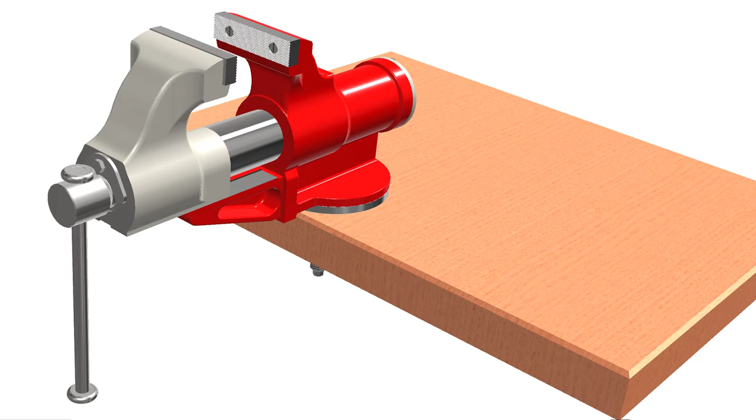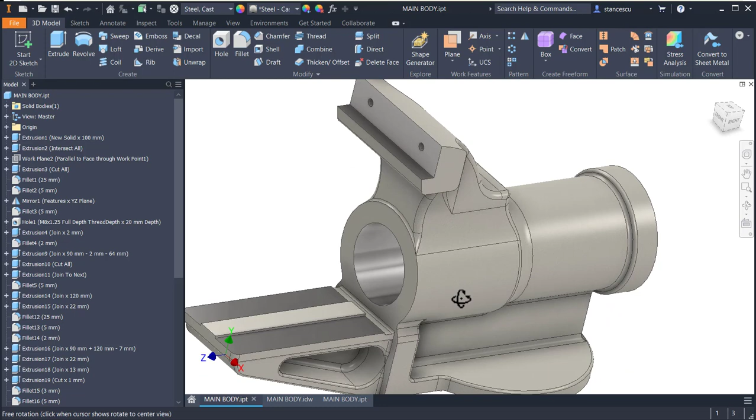Hi my friends, today we continue to construct this VISE by modeling the main body, the red one, which has this section, and this is what we want to create now. I modeled this already. I made also the drawing, to have all the data for our model.

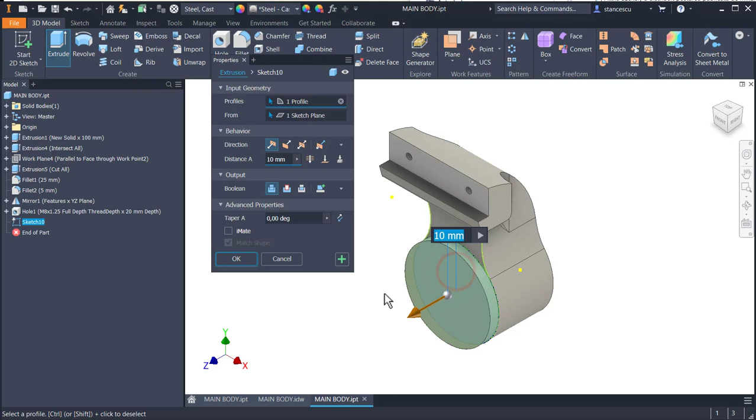So let's start. We open the body created in the previous tutorial and we add features. The first one is a circle. Over this sketch we place a circle, finish sketch, extrude this 2 millimeters. Okay, this is here, you see this 2 millimeters with the same diameter like the cylindrical body.

Now I'll add a fillet with a radius 2 millimeters, like this. Good. Now we go here to the back.

In order to create this extrusion, by respecting this dimension, which is of course also in the original drawing, you see 70 here for this edge. Yes, we try to respect the original drawing, of course.

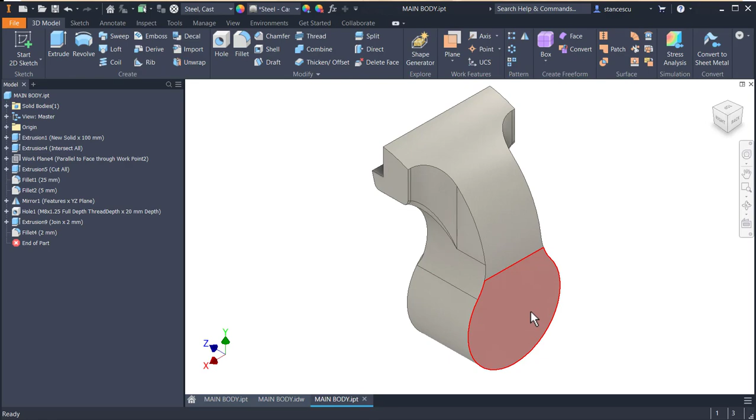Sketch, 70, horizontal line, dimension of 70, and we project geometry. No, this is not good. Geometry of edges, trim,

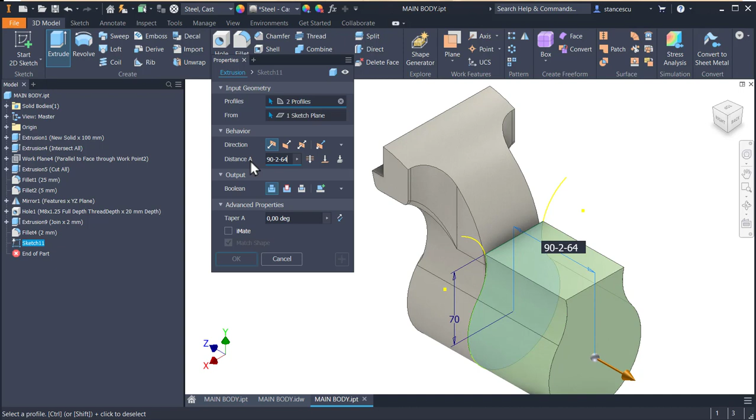and now we create the extrusion, which has dimensions 90 minus 2 and minus 64, which is the end of this, from the previous modeling of the small body. Extrude these two profiles. The distance is 90 minus 2 minus 64. Okay.

Now we have here a gap. You see, we need to cover, to fulfill that gap. But first, let's eliminate this pseudo triangle, by F5 to see back here, by projecting this face, and we obtain a line here, and we rotate on the other side to project also this line, which projects as a vertical line.

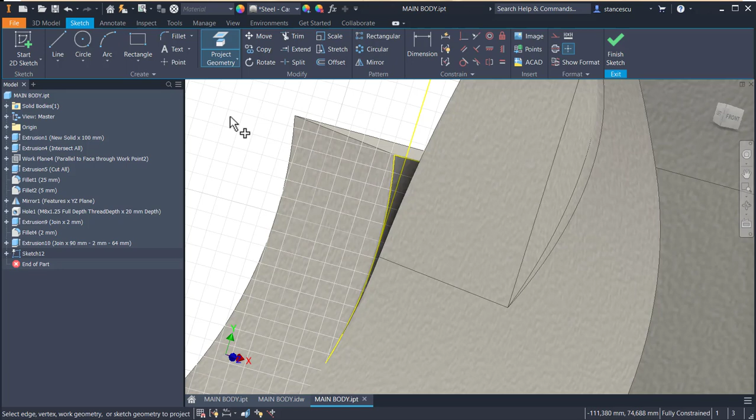Why? To apply extrude on this small triangle together with this other small triangle in the other direction, which is a cut, yes, all the way and that direction, yes.

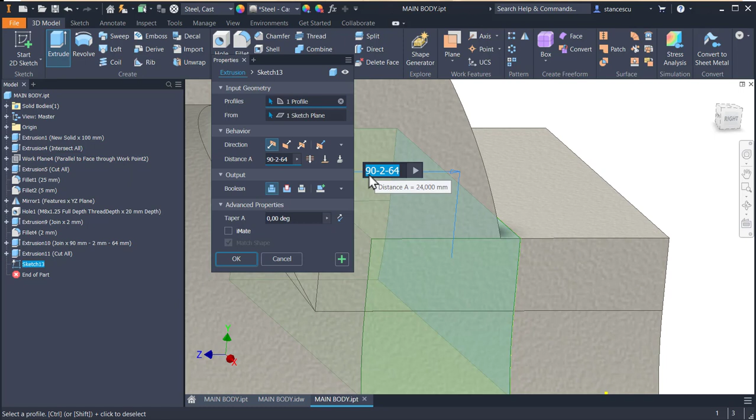Okay, now we have a new sketch here to be extruded to the face. Extrude, not 90 minus 2 minus, but to the part, to next. Yes, you see, we fulfill that gap.

Okay, good. Now if you take a look here, radius 25, radius 25, radius 2. And there are other radiuses on the other direction. Yes, for instance, 5 millimeters here, 5 here, and also this and this.

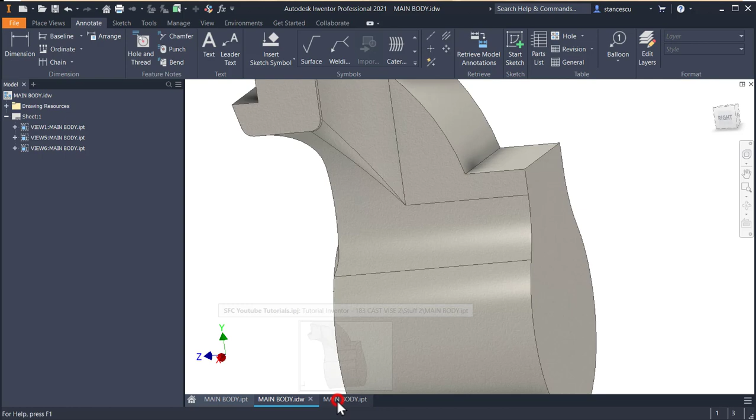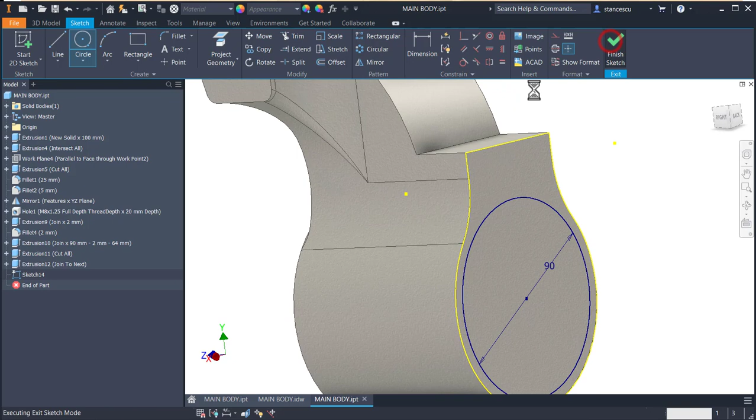But first let's create this cylinder, which is from the 90, 120 with a diameter of 90. Let's create main features and then fillets and so on. 90, diameter, finish sketch, extrude the circle on 120, a dimension in the drawing, also in the original drawing, you see, 120, this is.

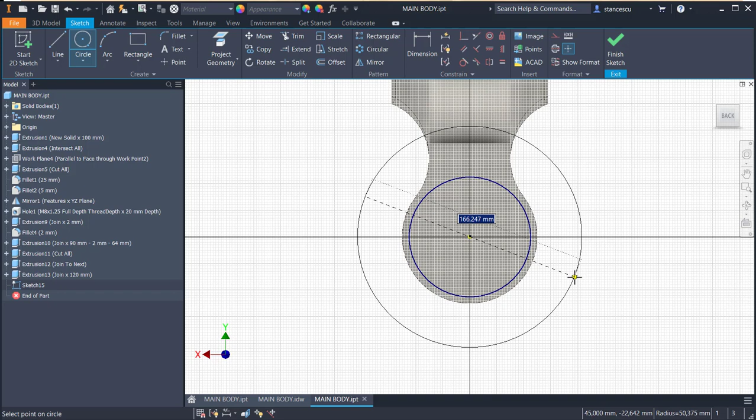Good. The other extrusion is this one, 22 with a diameter of 100. Let's create it here. 100 is a dimension of the main cylinder, so we can use this, but let me place here 100 as you see. Finish sketch, extrude 22.

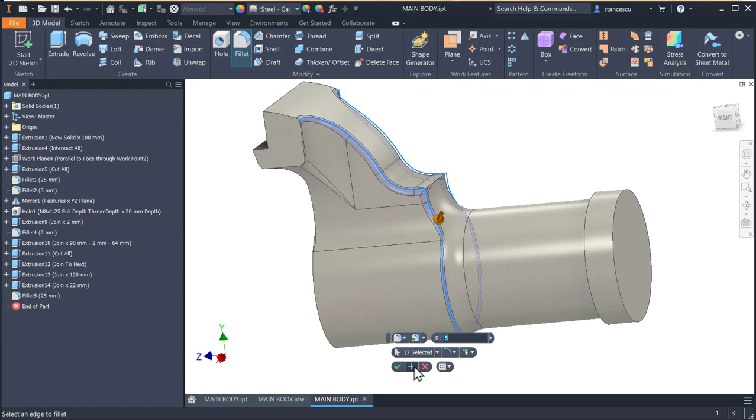Okay, we apply now that fillets 25, 25 here, plus 5 and 5 here, and around the object, plus 3 millimeters inside, 3, and 3 outside, and also 5 here, plus 5 millimeters and 5 here.

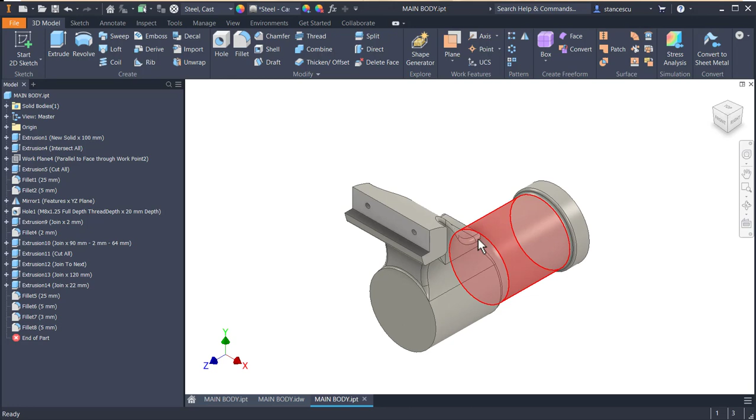Let me see if that's okay. Yes, of course, everything will be okay for this construction. However, I'll add another fillet of 2 millimeters here, 2, even if in the original drawing this is sharp, but I don't think that's good, so I placed also here radius 2 to have a smooth connection between these two faces. I think is better. Good.

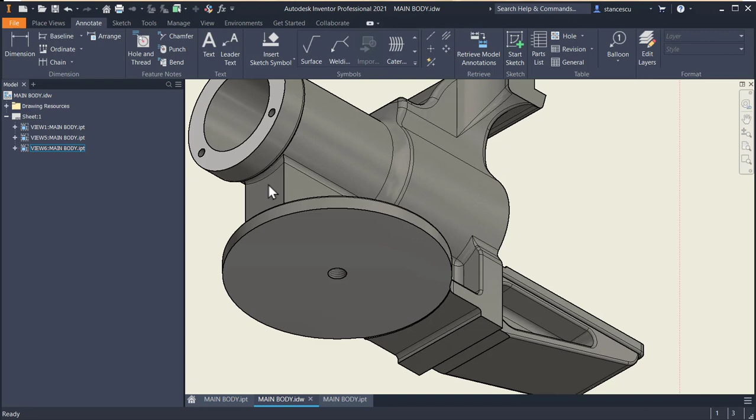Now we create another volume, which is this one. You see here, this or this one, with dimensions of 40, the thickness, and 97 minus 12 is this face, which is 85. So, and the length is 90 plus 120 minus 7, because we create it from here to here. We started on this face.

Let's start it. A rectangle of 40 tab, 85, not 85, 97 minus 12. Yes, we don't invent dimensions. We place this midpoint to the center point. Finish sketch, extrude

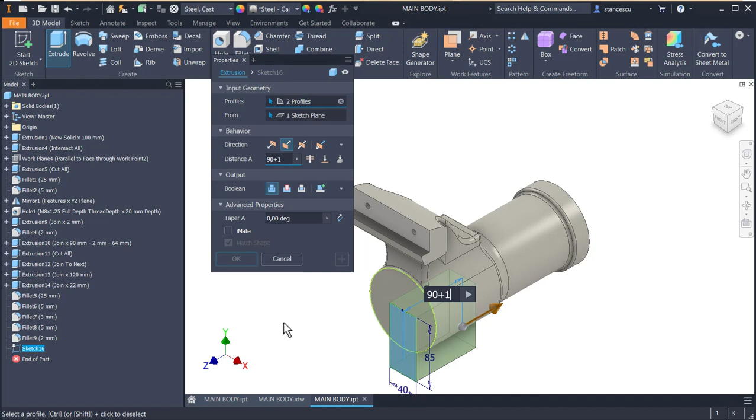this, the other direction, but not cut, join of 90 plus 120 minus 7. Okay, this is that volume.

Then there is another face here, this one, you see, which is this, which has dimensions. 60 degrees are these two lines, 86 the full width or length, and the dimension here is 104 from the center line, this face. Good. You will remember this, yes?

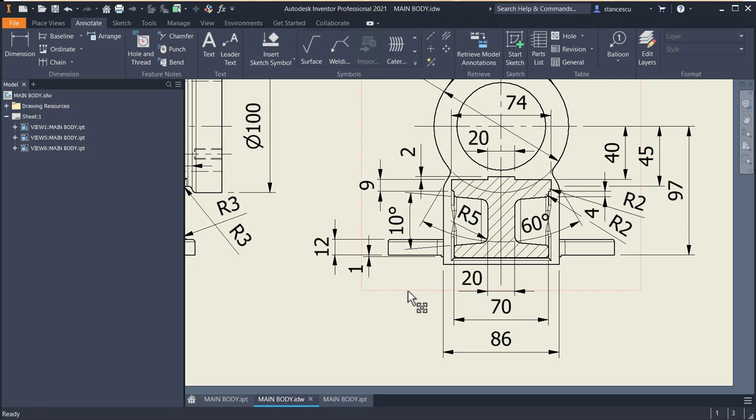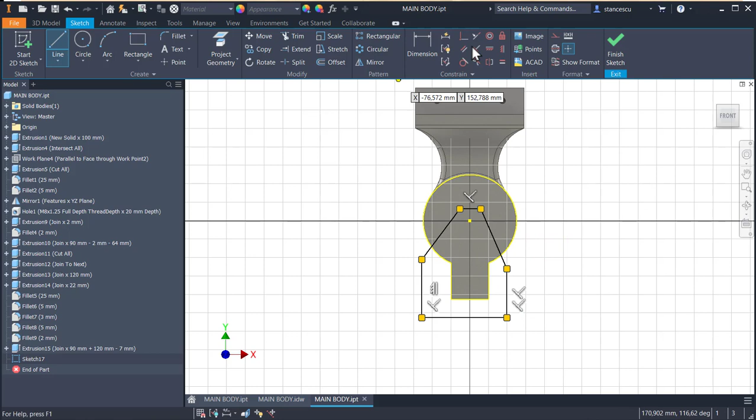104. Let's do it. The same face, line, line, another line. We go here and close. This midpoint over this, equal the two, and dimension of 60.

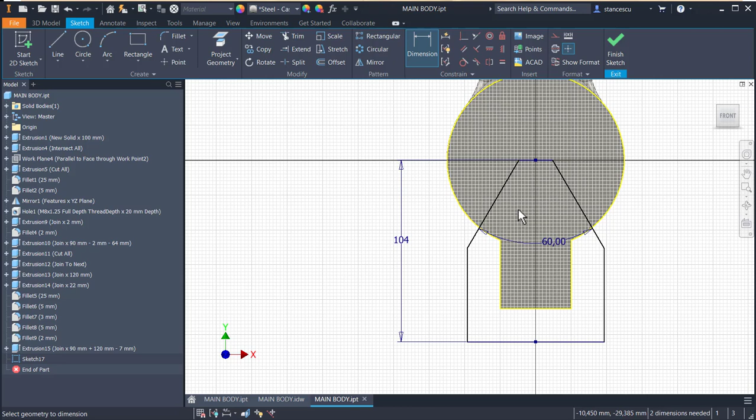Angle of 60. And if we place on the same vertical the midpoint with midpoint, we have a good, what is this is 104, yes, 104. But what is this? Let's see. This is 45. You see, this point is here, 45.

Okay, another dimension of 45. Finish sketch. The thickness is 22. You see here. Extrude this, the other direction, join 22. Okay, F6. Next is

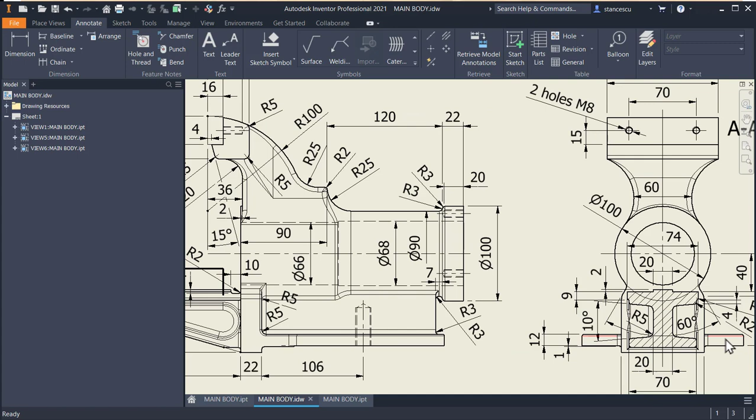this disc, yes, which is placed at 106 and has a diameter of 168, and the thickness is, be very careful, 12 plus 1, because there is a small gap here. Yes, and let's create, the diameter is 168.

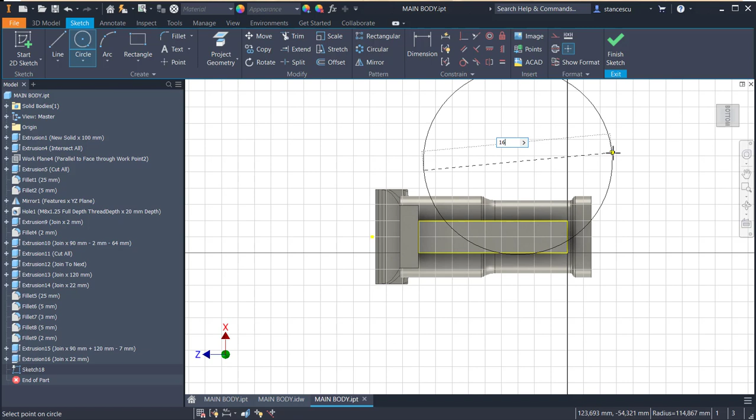Circle 168 placed on the same horizontal with this point. Horizontal is vertical here because Z is vertical, and 106 from here. Yes, you see, dimension 106.

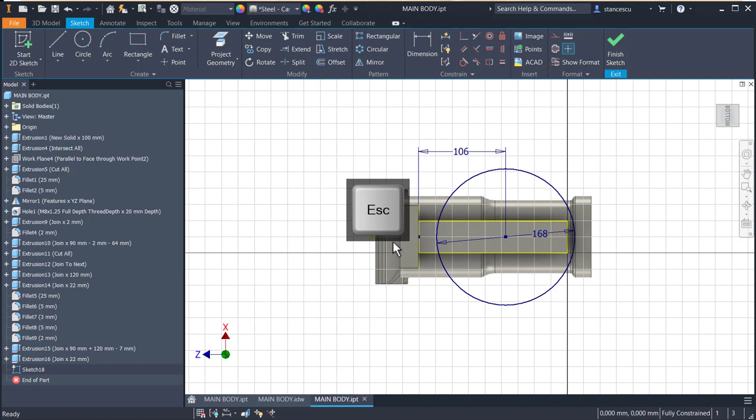Good. Now I make this construction because I have to draw 1, 2, oh, this is not horizontal, in fact vertical.

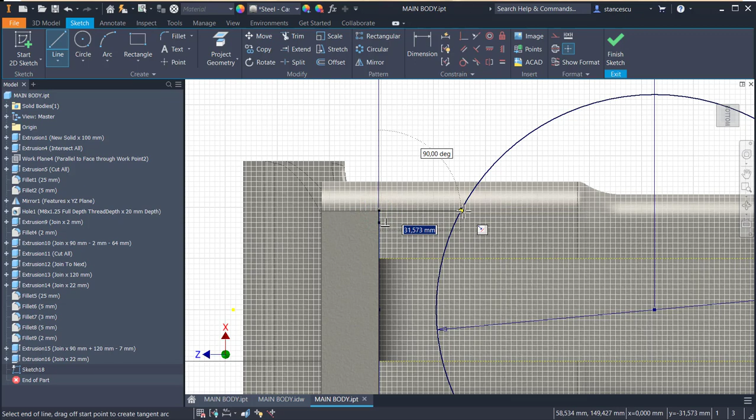Because another is this one. I correct this to be horizontal, which means vertical, but it connects two lines. This is the problem. It appeared this edge, so I have to cut, to delete this line, and to draw another one from the point to here,

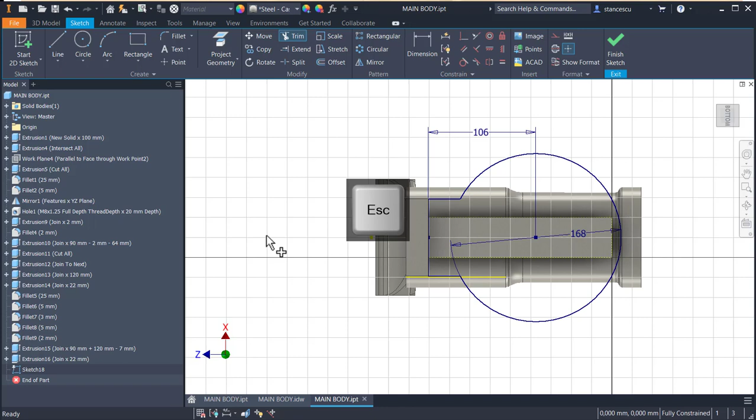trim this and also this. Yes, nothing is missing. Okay, finish sketch, extrude 13, as I said.

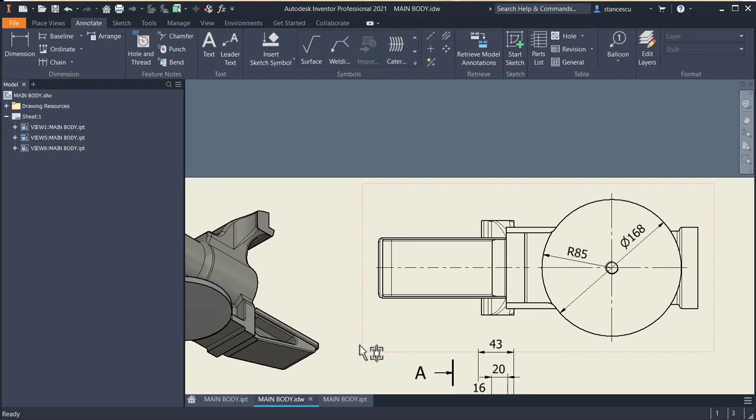Okay, and now that gap is because we want to apply a machined face. This face you see here, this is machined, polished, and there is 1 millimeter here. The diameter of that, the radius is 85. So we make this construction and we create a circle with the radius of 85.

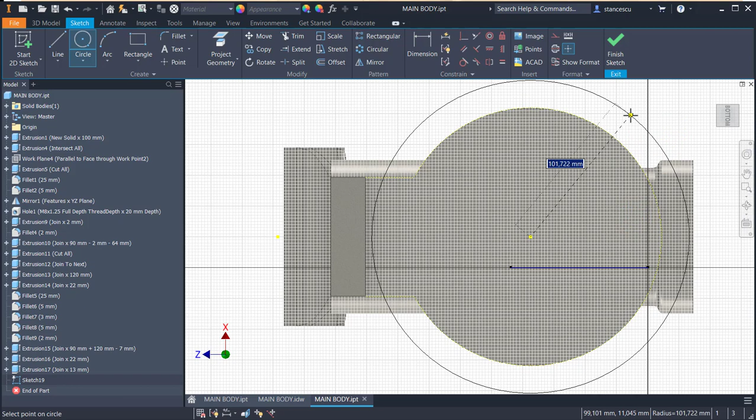Yes, there is a small distance here. Finish sketch, extrude, the other direction, cut indeed, but only 1 millimeter to be polished. Yes, now there is a small gap here.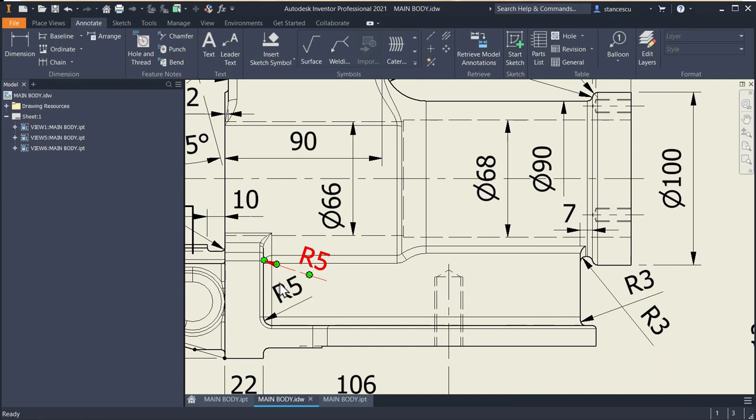Okay, it looks very nice, but let's see what about the fillets. Radius 5, radius 5, radius 3 here, and also some radiuses, 10 here and 5 here. 5, 5. Okay, let's apply these fillets.

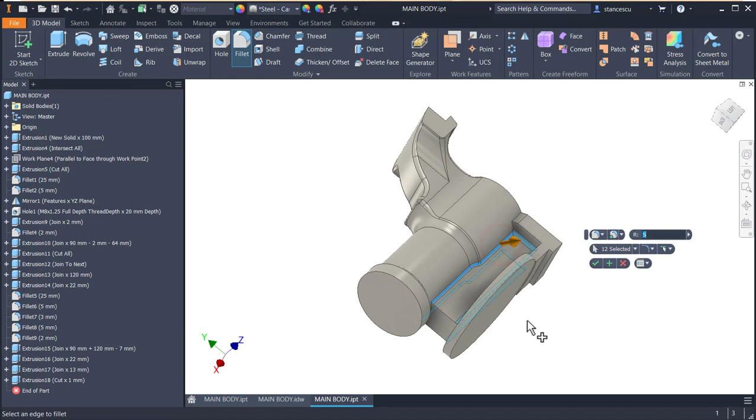So this is 5. Also 5, also 5. All this. Plus this one and this one. And plus this with 10. And on the other side also 10, plus here we have 3 up and down.

I think that's all. Yes, let me see once again. Yes, they are okay. Good.

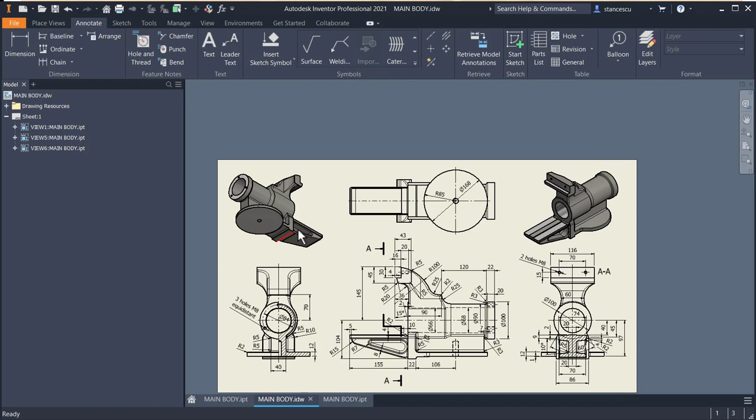Now we deal with this plate. There is a plate here, yes, which is this one, which is dimensioned here 9 millimeters thickness, starting from 40, and the width is 74. Yes, 40, 74, 9. And the length must be here 155. Okay,

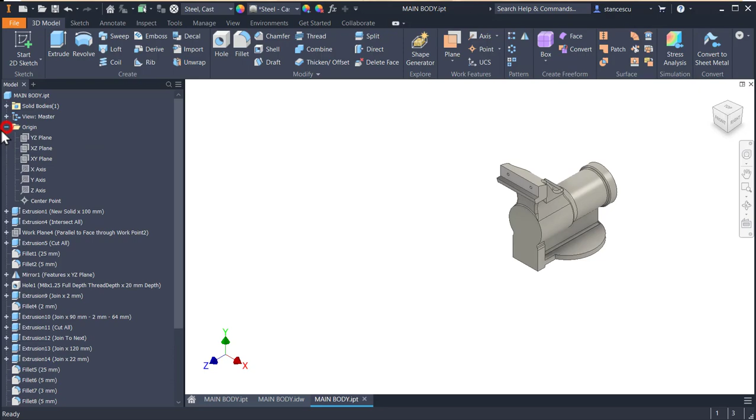we use a work plane, this one, origin plane, F7, rectangle 9, tab 155, alignment between this face or line and this line.

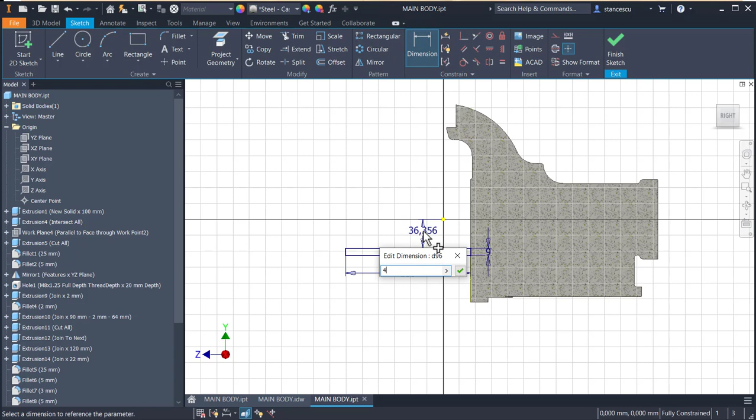We move the rectangle here to apply 40 millimeters from the center. Finish sketch. Extrude symmetrical on 74. Okay.

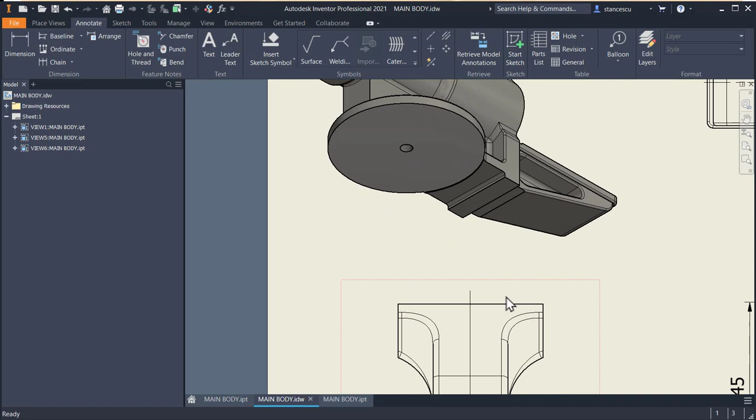Now we take a look to this volume, which is behind that plate. Yes, this. It has two hollows, two pockets on the sides, but we have dimensions. As you can see, this line starts from this point. Yes, but there is a dimension missing here.

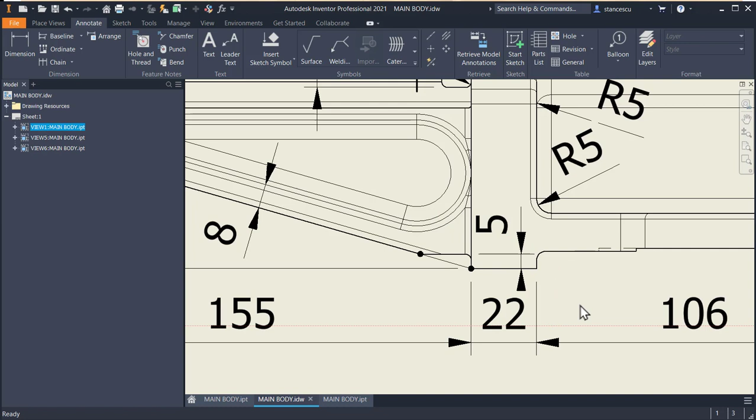You have to know that I add dimensions on my drawing when I see that they are missing, so you have to consider the last drawing as good. I'll show you at the end that drawing, not the first one, because there are some missing dimensions. Nobody is perfect, my friends. Nobody.

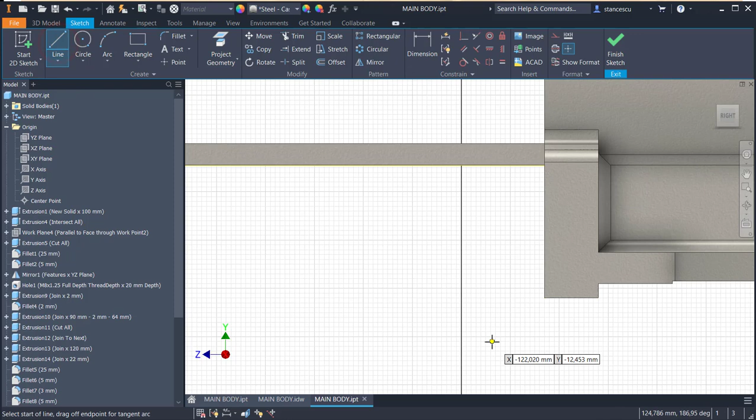Good. 5 for this line. 5 here and radius of 15 at the end. This is what we have to create. We use the same plane of symmetry. We project the two lines here and we draw lines. We start from this very point to here and an arc at the end.

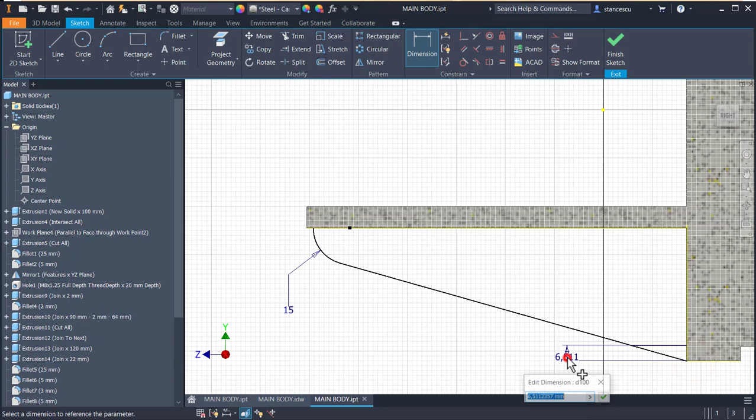Yes. Another line is here. We know dimensions. I want to be sure that this point is on this line, F7, coincident these two, radius 15, five and 5. Fully constrained. Now split this line and we make this construction line.

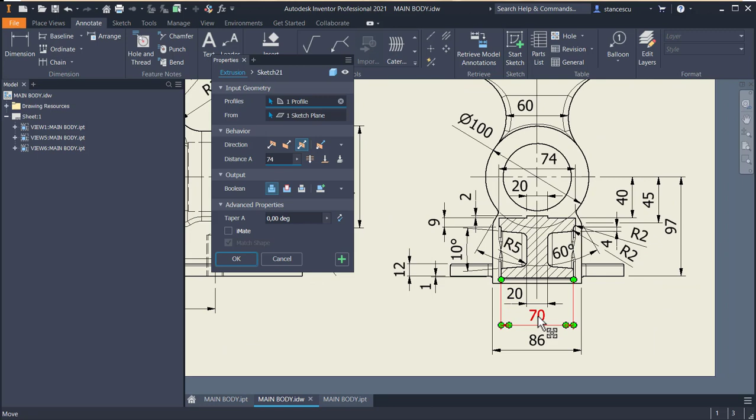Yes. I also draw here two lines. 1, 2. Now we have a closed contour, so we can finish the sketch. Extrude, symmetrical, on 70. Yes, this is not 74 but 70. Okay,

now the pockets. You see, not many dimensions are here. Radius 7, distance 8, and tangent here. Yes. And there is another dimension somewhere. Look, this one, 4 millimeters.

And be very careful. We have a slope. Yes, here. We'll apply a special extrusion here. Let's do it. You remember dimensions, yes? 4 millimeters is here and 7 and 8. Good.

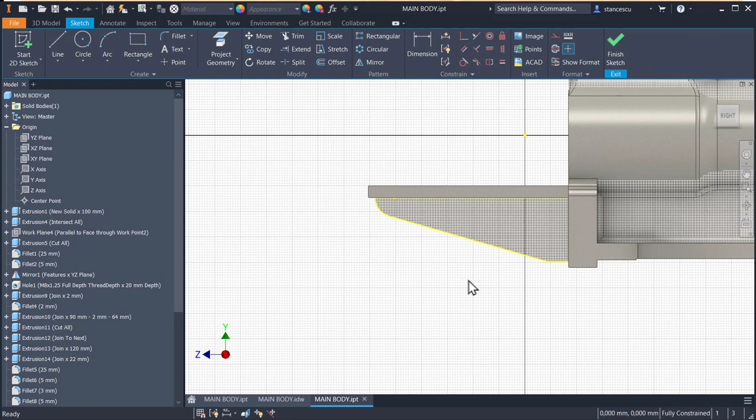On this face, not the mid plane, F7, I draw a line, a parallel line with this one. You see, if you go to the line, you have the parallelism. Now press the left button of the mouse and create a tangent, then a horizontal, keep pressed and close here.

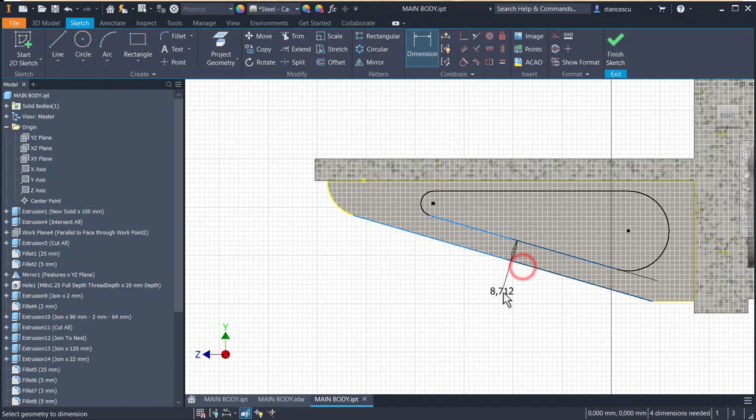And now we have to add tangencies. One is this one and the other is this one. Dimension 8, radius 7, and tangent this arc to this line. That's all. Not all, because that 4 millimeters was forgotten by me. Good. Now it is fully constrained.

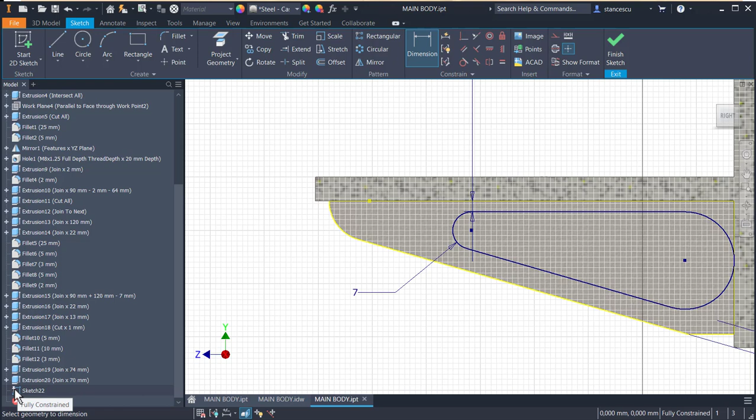You always have to see if sketches are fully constrained, and you have here a pin and the text fully constrained. You can check every sketch to see if they are fully constrained. Be careful with this. Finish sketch. What is the depth of the pocket? The depth is 70 minus 20 divided by 2. And we apply a taper, yes, of 5 degrees.

Extrude this face, cut, dimension is 70 minus 20 divided by 2, and the taper is 5 with minus 5. You see, if you look here, you see that there is a slope face on each edge. Okay, F6.

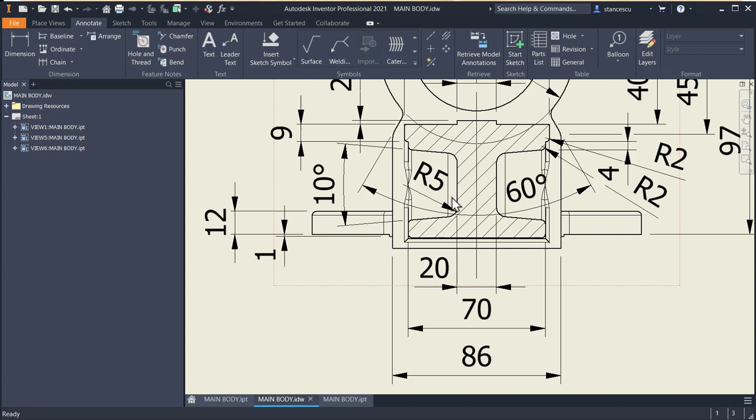Now I apply 2 fillets to apply then mirror, radius 5 and radius 2. Yes, radius 5 and radius 2. Let's do this. This is radius 5. No, this is 2 plus 5.

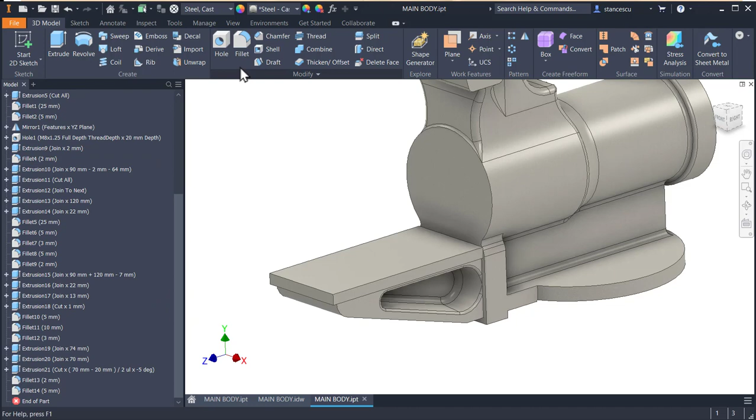Okay, and now the last 3 features, 1, 2, 3, must be mirrored about this plane. You see?

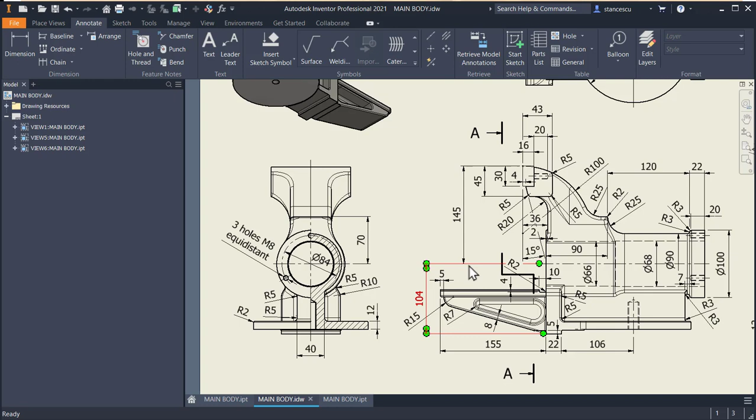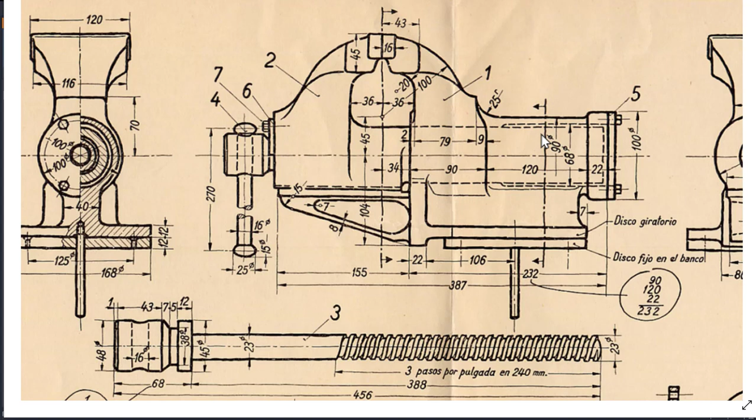Okay, the other dimension fillets are a radius, a missing radius. You see here there is a fillet. What is this? It is missing. I place it here, and you have to remember that radius 5 is. You have to look at the last drawing in this tutorial as the original, and you have to know how much I work for you. Yes, this drawing is made by me, and there are differences or missing elements here. Yes, where is the radius 5 here? Nowhere. And many other. You'll see when we finish. Yes, good.

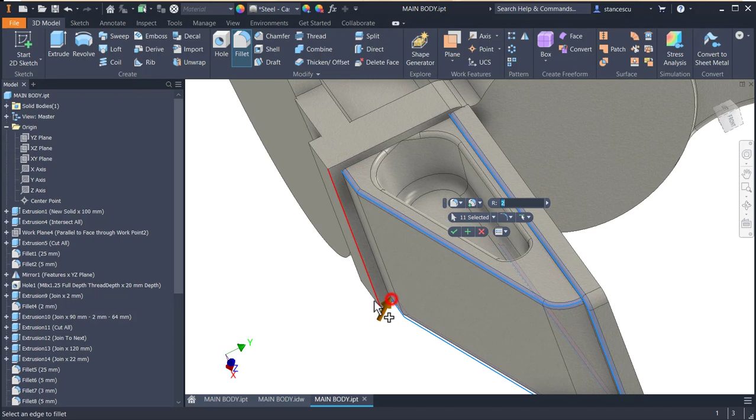So radius 5, let's apply radius 5 to this 2. 5 is already selected, 5 plus 2 on this contour. Yes, and also this, which doesn't have the radius there. So let me apply that fillet, and also here, which has dimension, I am sure of this, and also here.

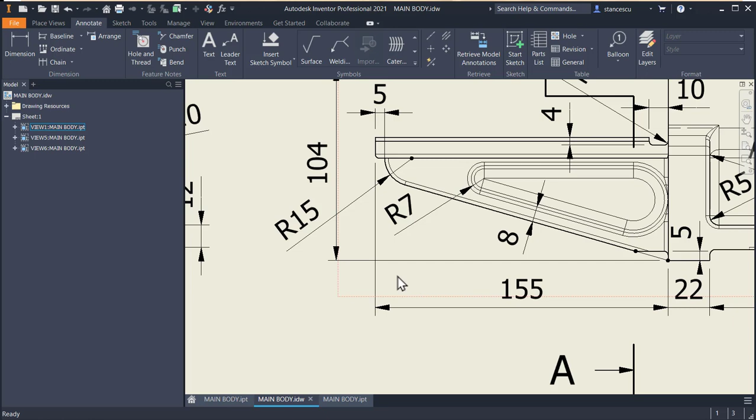F6. I'll add a radius here to be sure that you will respect it. Yes, I count on you. Dimension. Oh, that is not a radius. That is another element. Radius 2 here, and I don't know why this is not a radius, because see, this one is.

This is an ellipse, yes? That's why I cannot place a dimension there. No problem, these are minor problems with our construction.

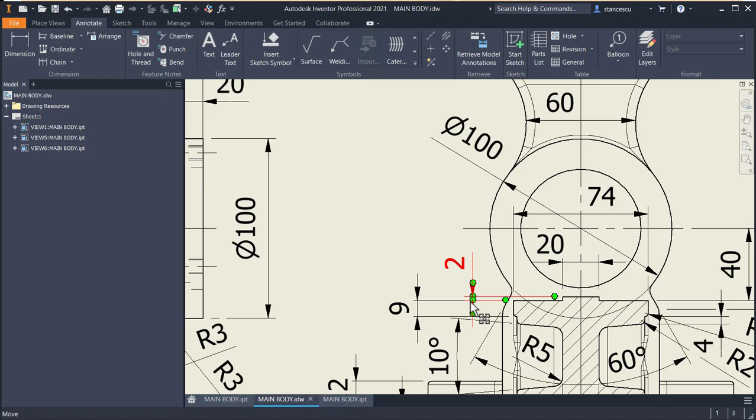Good. The last elements here are about this guide. Yes, this is a guide 20 with 2 millimeters, and it is not finished to this face, but there is a 10 by 4 gap at the end. Let's apply this guide.

We create a sketch here on this face. Construction for all lines. 20 on 2, and this midpoint to be on this midpoint. Finish sketch. Extrude the other direction. Join to the face, to next. Yes, to here. Okay, and now in the plane, in this plane, I create a sketch.

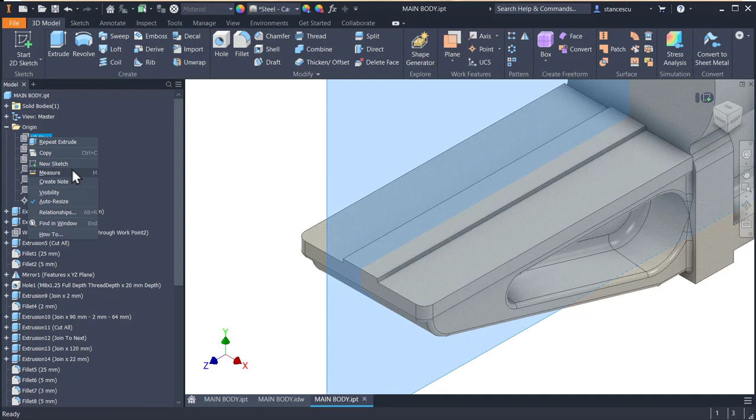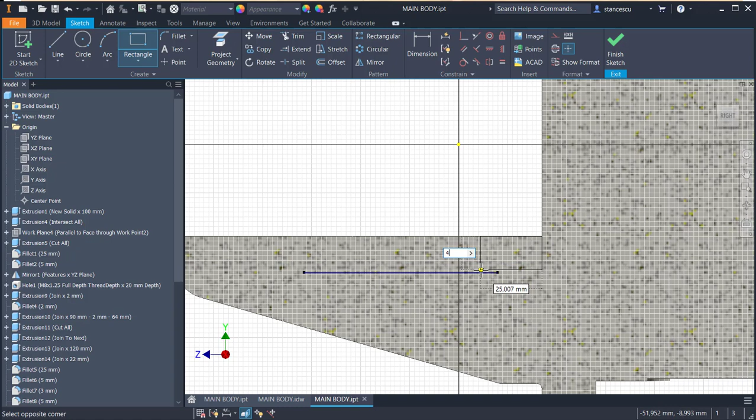F7, a rectangle from this point to the left and down with the values 4 to 10. Finish sketch. Extrude with cut symmetrical all the way out.

Okay, and the last is this 2 millimeters, which is already selected, and 2 millimeters here. I hope this is all, my friends. With this, we apply now some... oh, there is a hole here.

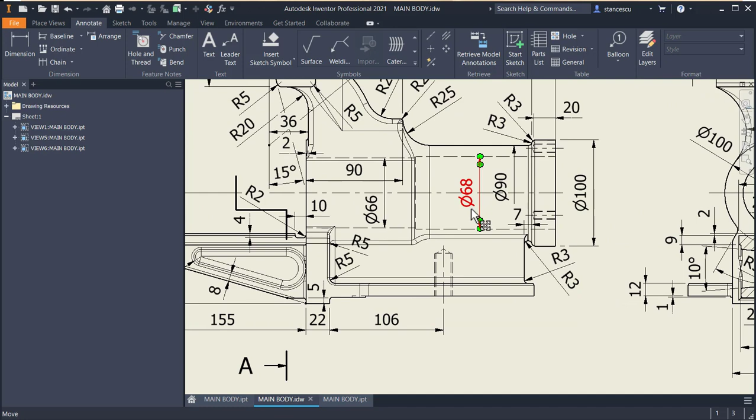What is this? Let me check the values. This is 68 and this is 66. The depth of this is not dimensioned. If you see it, tell me where it is. So I add this dimension from here to the face. 100. Oh, I remember that I placed it somewhere. No, this is not placed. There are mistakes everywhere.

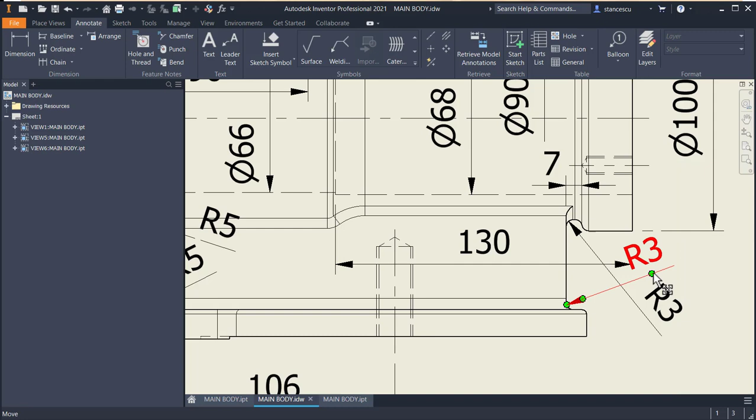We are surrounded by mistakes. 130. So I'll create a counterbore of 68 or 66 through the whole cylindrical body with 130 here. Good.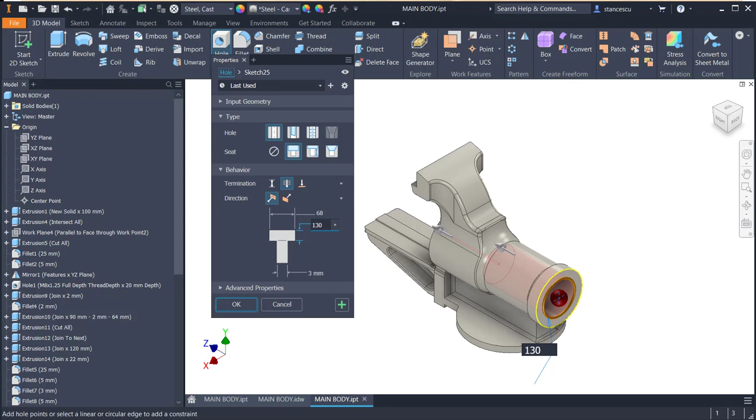Let's use this face for a hole on this face, on this plane, centered here, not threaded but counterbore through all. Dimensions are 68, 130, not that but directly 66. Yes.

Okay, there is a small gap here. Okay, and not finished. We must place here 3 holes. Yes, 3 holes, metric 8, equidistant, with a depth of 20.

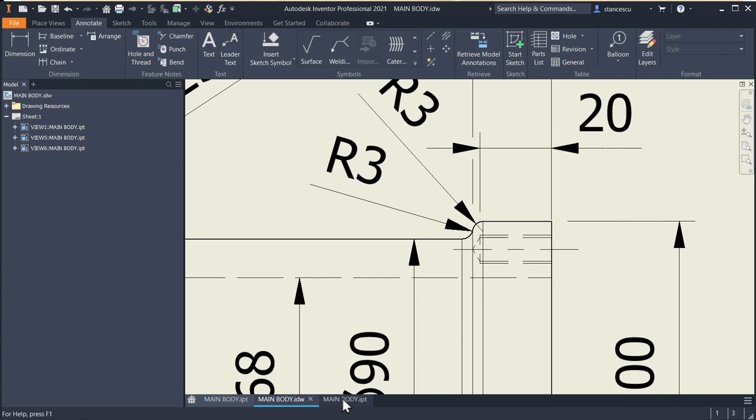Nothing is simpler. We select the face, we place a point somewhere here on no line, vertical with the center point, and the distance is half of 84. Yes, 84 divided by 2.

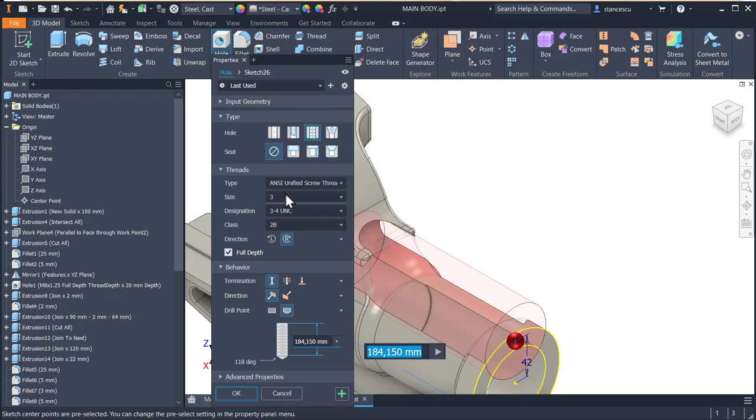Okay, finish sketch. Hole, not counterbore but cylindrical, not through all, 20, metric, so I have to select ISO, how do you say, 8 is this. Yes, not 22 but 20.

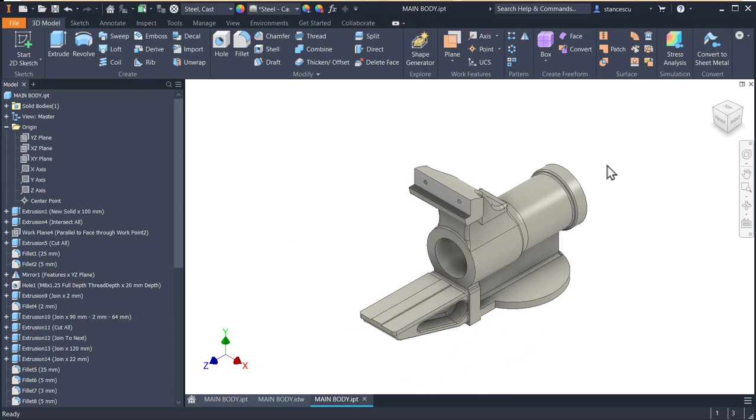Okay, and also the circular pattern to create 3, not 6 but 3 equidistant holes. My friends, oh, there is another, there is a hole. You see, there is a hole here. It is dimensioned... it is not dimensioned.

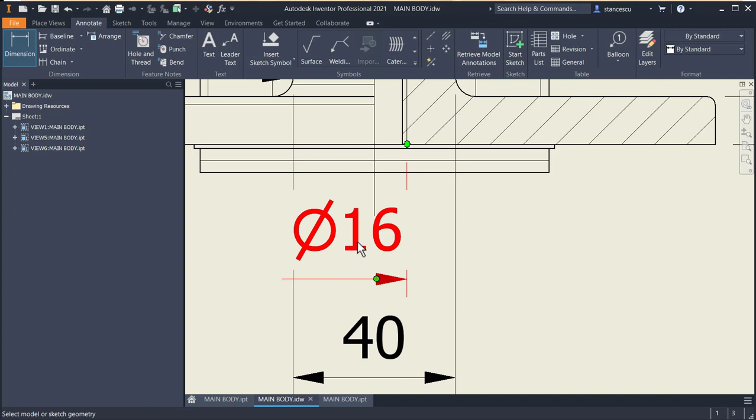I told you, nobody is perfect. Dimension from this to this, diameter, yes, and once again click here, hide the dimension value and metric 16. Okay, this is the dimension there, and the depth of this hole is 40.

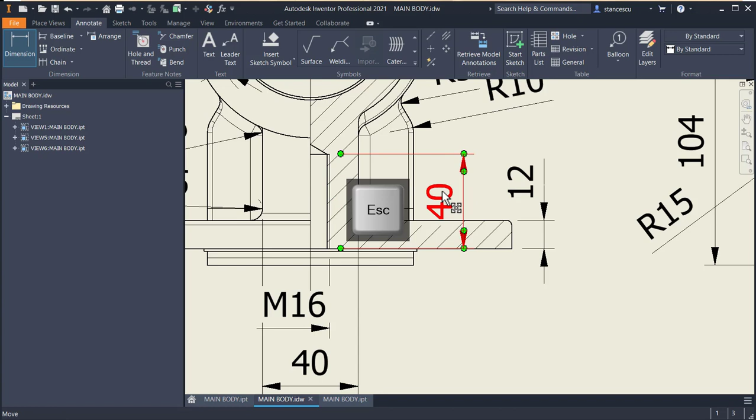Good. Hole, face, center, 16 and 40.

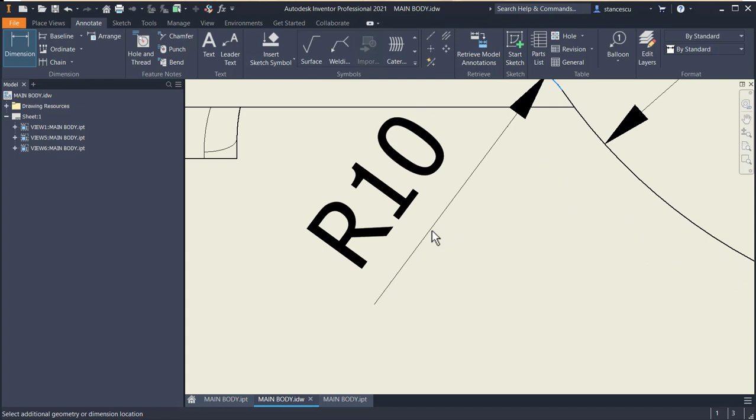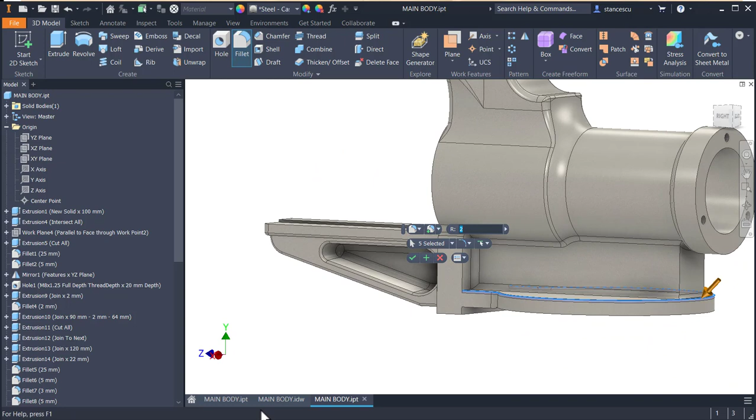Okay, now I think they are all okay. You see, there is a radius here, forgotten radius. Radius 10 on both sides. And of course there is another fillet, you see here, radius 2. Yes, because this part is cast steel. So I apply here radius 10 and also on the other side, and then plus 2 around this, and here is another radius 2.

You will be careful with all these elements in order to respect the memory of Timoteo Carrera Soto, who created this. Look here, is 3, not 2. Nobody is perfect, I told you. Again, double click here and 3. Yes? Oh, not there, 2 is this. And control to select this, then apply, and here I apply radius 3, distinct radius from the others.

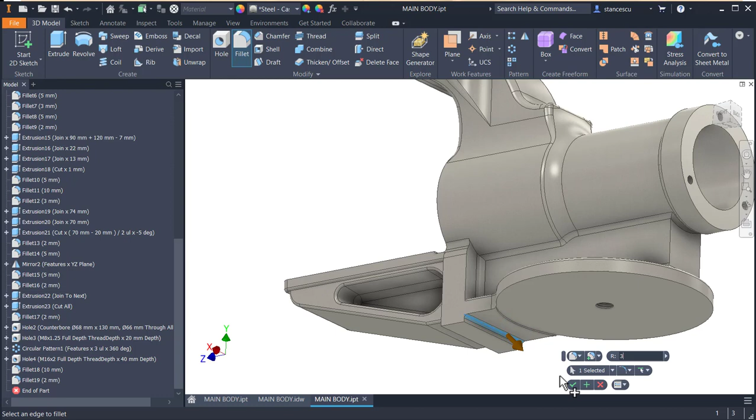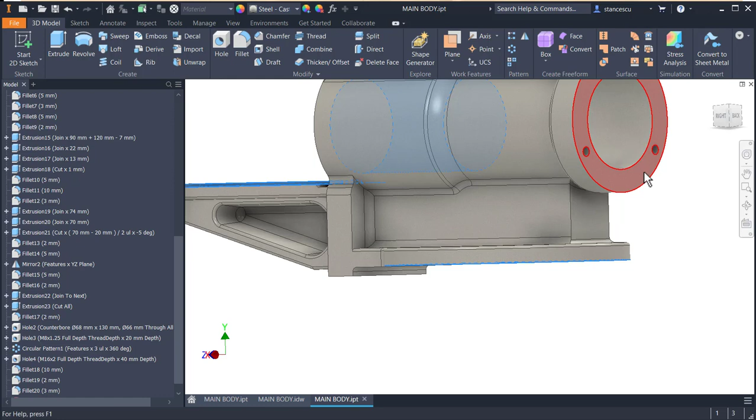That's all, and enough. Yes, let me select faces to make them polished. These are polished. And also this one, I keep pressed the key Shift. Yes, you have to know how do I select. This is also to be polished, still polished. F6. This is the part, my friends.

Let's see what are its data. Main body, iProperties, physical, update, 18 kilograms, and you will check the volume, yes, to be like mine.